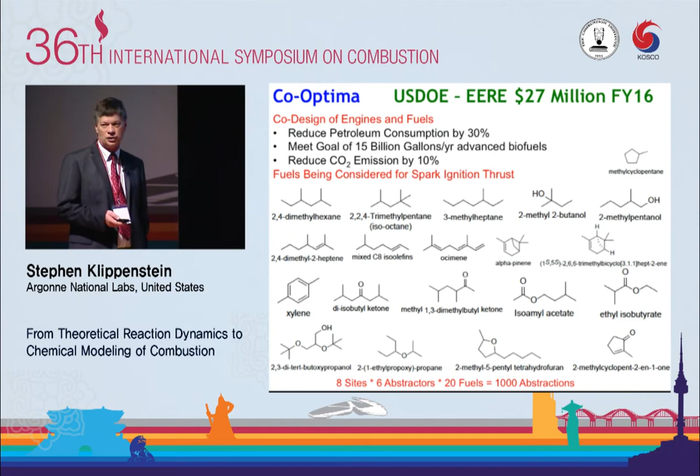So Bill Pitz, for example, is working on this project. He has to try to come up with rate coefficients for those 1,000 reactions, just for the first stage, just for understanding how we get the fuel radical.

Of course, things are much more complicated than that. I want to take a few minutes—this is going to be a somewhat detailed slide, and I apologize for that, but I think it's worthwhile to give you some perspective on what's involved in the whole modeling process, so you can see how the different theoretical things I'm going to show you contribute to this overall modeling effort.

I just described how many reactions are involved in just the first step, the abstraction from the fuel, and I said that's the general procedure for producing the radical. There's also, at higher temperatures, sometimes simply a molecular decomposition to two radicals. But either way, the first step in the process is formation of a radical. And when thinking about combustion, the key thing is to try to understand how we get chain branching—how do we get converted from one radical to two radicals? That's a complicated problem in general.

In almost all cases, there are two different kinds of pathways you can follow. One pathway is operative at high temperatures, and another pathway is operative at low temperatures—low temperatures being about 1,000 Kelvin and lower, and high temperatures being the reverse.

In general, the high temperature pathways correspond to the largest and majority of the conversion of the fuel, so that's really the foundational part of combustion, and that's where we've put most of our theoretical work. But the low temperature pathways are really important for understanding things like knock, stability, and whether your engine is going to function. There's a lot of interest and focus on that, especially now as we find low temperature combustion is probably the driving force for improving efficiency.

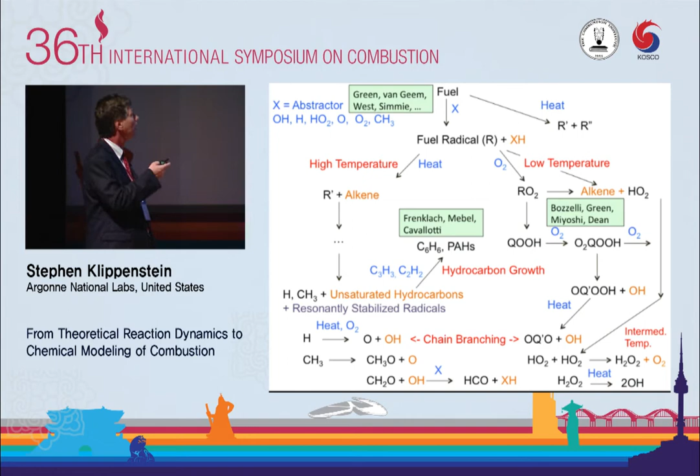The low temperature pathways—Joe Bozzelli has done a lot of work mapping out the potential energy surfaces. Bill Green, Akira Miyoshi, and Tony Dean have done a lot of work turning representations of the potential into rate coefficients for these processes. Mike Frenklach has done a lot of work on PAH pathways, and Alex Mebel and Carlo Cavallotti have also done a lot of work.

This list of people, of course, is very incomplete. It's a large community that has contributed greatly. I'm just trying to highlight some of the leading players.

We've done a lot of work on various aspects. One of the things we try very hard to do is high accuracy studies of prototypical cases. Our studies have tended to look at smaller molecules where you can do really good things, and then the community can build from that knowledge to understand and improve the accuracy for larger systems. I'm going to tell you mostly about these small molecule studies because that's what I do, but it's important to realize those studies can be used to propagate into better understanding of larger species.

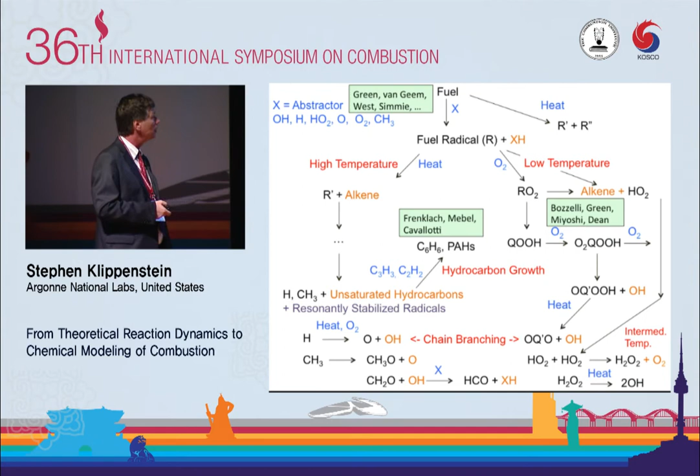Before I get into the theory, it's worthwhile to summarize the standard procedure of developing a chemical model. We have this big mechanism—where do we get all the parameters? The parameters are thermochemical properties for all our molecules, reaction rates, temperature and pressure dependent representations of the reaction rates for all reactions that convert one molecule to another or set of molecules, and transport properties. It's such a huge database we can't possibly determine everything from first principles or experiment.

So the people who do the modeling generally have programmed up empirical rate rules that are developed by consideration of specific studies. Because there's lots of qualitativeness and uncertainty to those rate rules, you don't have a mechanism that will necessarily quantitatively reproduce reality when you first try to simulate things. So there's a lot of work in the community to take the mechanism they first developed and then calculate, predict, and model various observables that one can measure with experiment.

The standard observables they focus on are ignition delays, flame speeds, and species profiles, measured at various temperatures, pressures, and stoichiometries. So the first stage in modeling, after putting together the parameters, is to see how well you reproduce these things. Almost always, when they first run those simulations, they find significant errors in their predictions—significant discrepancies between predictions and observables. Then they have to figure out why those discrepancies are arising.

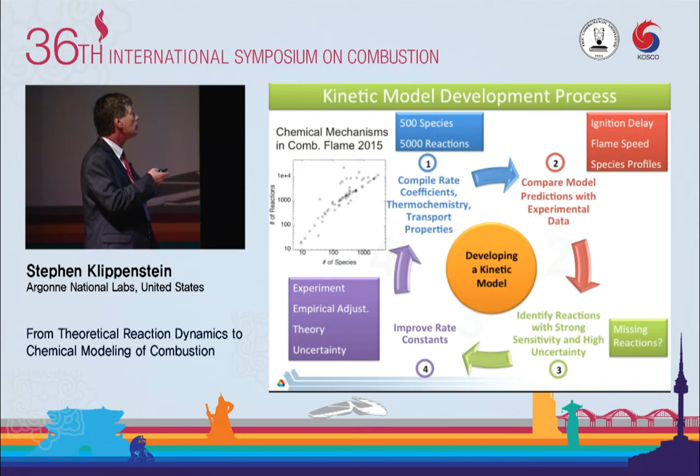More generally and more commonly, what we use theory for is to study specific reactions, these reactions that we identify here. Theory is now able to be implemented quickly enough that many modelers, such as the Curran group and Fei Qi's group, will employ theoretical calculations as part of the mechanism development process.

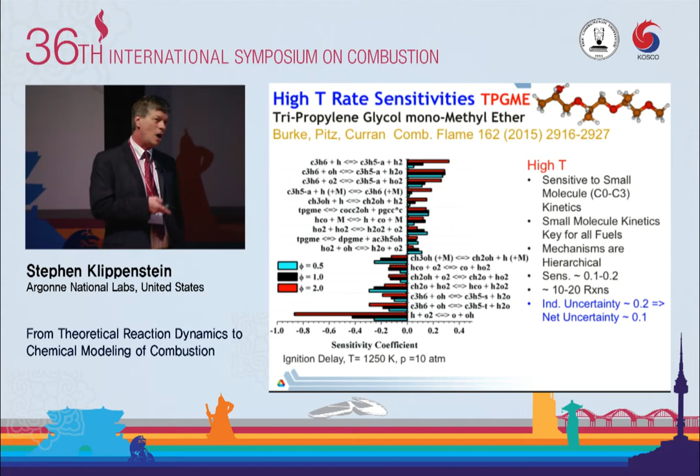If we could get all these small molecule rate coefficients accurate to about 20%, and I'll suggest that's where we're at nowadays in theory, then since there are about 10 or so reactions with sensitivities of about 0.1 or 0.2, your end uncertainty in the ignition delay is only about 10%, which is comparable to what a lot of the experimental measurements of ignition delays are anyway.

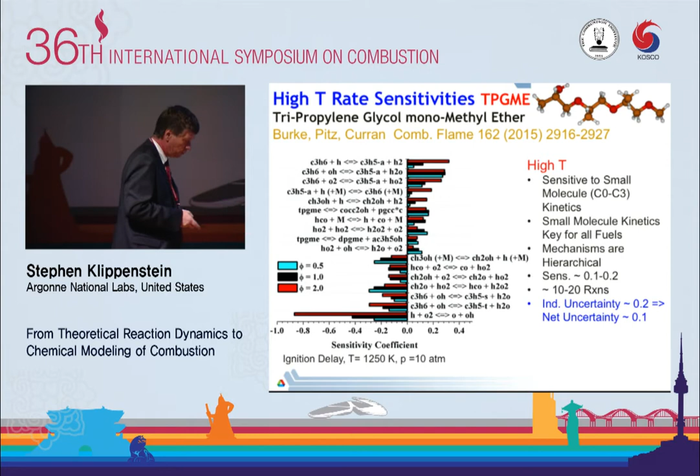So in principle, I'm claiming that you should be able to make a completely a priori mechanism that predicts the ignition delay for standard things to a high degree of accuracy.

At lower temperatures, the picture is not quite as rosy. There's still a great contribution from theory, but now these sensitivities start to be much more with regard to larger molecules.

The abstractions from the fuel, beta scissions of the fuel radicals, molecular decomposition of the fuel. And furthermore, we need to understand these at lower temperatures, and any uncertainty in energy just gets expanded as you lower the temperature. So our ability to predict the key observables is somewhat reduced. Nevertheless, theory is still a great contributor to that process.

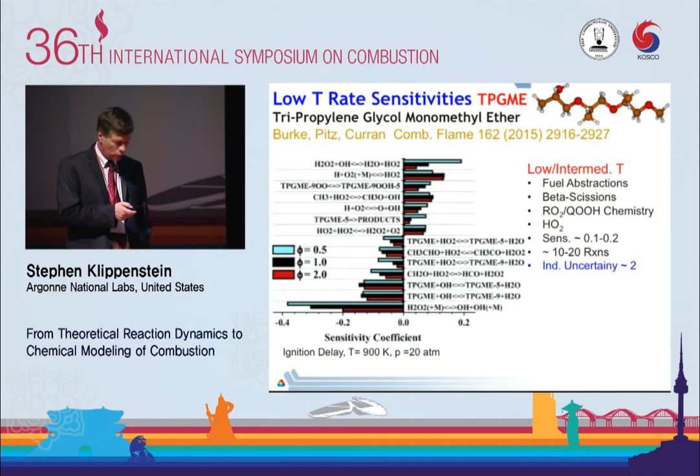In order to start thinking about our theoretical predictions, I'm going to show you shortly, it's useful to think of what the generic model is that we use. We like to call it the ab initio transition state theory-based master equation approach.

The general thing that one needs in a chemical model are temperature and pressure-dependent rate coefficients for the rates of conversion from all the different chemical species, chemical molecules. I'm showing a schematic plot, picking a sample reaction with two wells, W1 and W2, and two separate bimolecular products. I'm going to try to take you through the process of calculating thermal rate coefficients, phenomenological thermal rate coefficients from the master equation.

To do that, we have to think about what happens at a microscopic level, at the microcanonical level, at an energy resolved level. The first thing that happens is you have chemistry going on: isomerization reactions, dissociation reactions, and if you're starting on this side, you might have an association reaction. So we have to be able to understand these rate coefficients for microcanonical energy resolved rate processes.

Another thing that happens is this chemistry is going on in competition with collisions in a bath gas. You have some kind of large bath of nitrogen molecules in a typical combustion simulation, and those nitrogen molecules are colliding with your molecule while it's reacting, raising it up and down in energy. We have to model that process in combination with modeling the process of dissociating.

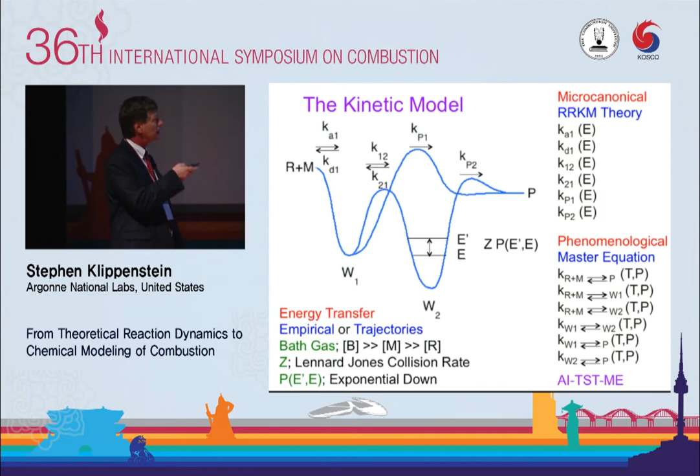One of the neat progress we've had very lately is realizing that we don't need to make this empirical model - we can actually start to calculate them. That's coming from work of Ahren Jasper, and I'll talk a little bit about that later. But this is the classic model, what we call the ab initio transition state theory master equation model.

I don't work by myself. One of the great things about working at a national lab is we have a team of world experts working on closely related aspects of the problem. Just implementing this ab initio transition state theory master equation approach is really the work of a team of 5 of us distributed amongst Argonne and Sandia. I talk with basically all these people on a daily basis as we're trying to probe and think about how to do our calculations better and study specific systems.

Many of you may know Larry Harding. He won the gold medal in San Francisco for his work on electronic structure. He's a leading expert on ab initio electronic structure calculations, particularly multi-reference ones, which are a more complex variety. Yuri Georgievskii is a research associate who knows more about chemical physics than I do, and does much, if not all, of our programming work, and has developed some great codes for us to implement and use in our rate predictions.

Ahren Jasper is here today. He's our leader in chemical dynamics and has contributed greatly to our recent progress in understanding how pressure enters into the simulations. And I'm sure almost everybody here knows Jim Miller. He's another gold medal winner, and he's taught me essentially everything I know about combustion chemistry, and is also one of the leading parts of our work on the master equation.

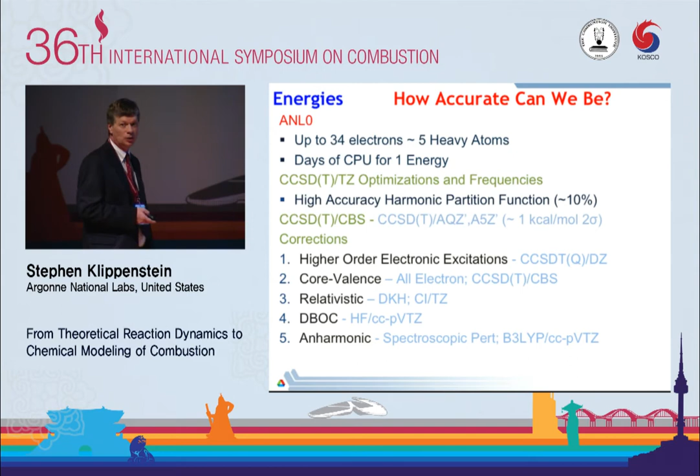We might have to calculate thousands of energies in a simulation. We can apply this approach up to about 34 electrons, which is about 5 heavy atoms, 5 carbon atoms. If we try to go to a few more, maybe 7 or 8 heavy atoms, we can cover essentially all of the prototypical reactions of classes of combustion. This method doesn't let us do a big biofuel or bioester, but it lets us do representative reactions in all the classes we're interested in, and it's particularly useful as we build up our knowledge base.

Another key member we have at Argonne as part of our combustion chemistry group is Branko Ruscic. He's developed an outstanding way to try and determine thermochemical properties, an approach he calls active thermochemical tables. In this approach, he collects all the available experimental and theoretical data regarding thermochemistry of a set of species, and makes sure that the thermochemical properties derived from that data are all self-consistent. That requirement of self-consistency leads to a huge reduction in the estimated uncertainties of your values.

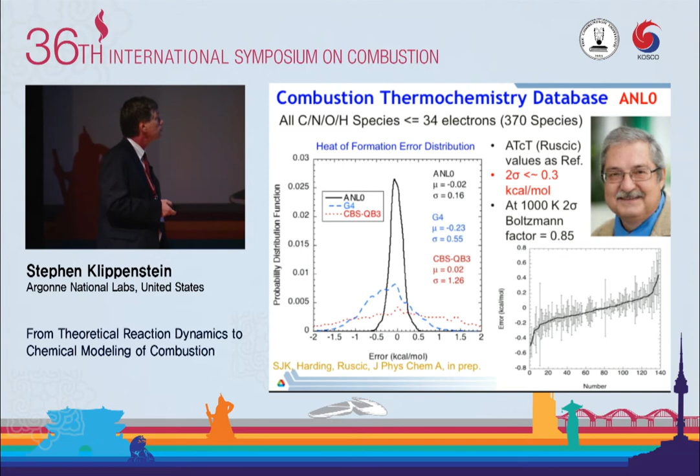Another approach that's kind of intermediate between these two is something called G4, which was developed by John Pople, a Nobel Prize winner for electronic structure theory. So that's the kind of accuracy we can get for the heats of formation, and that's nice. But when we do rate calculations, we actually need to know what the accuracy is for the transition state. Nobody knows what transition state energies are, so we can't do the same kind of analysis — I don't have any reference values to compare to.

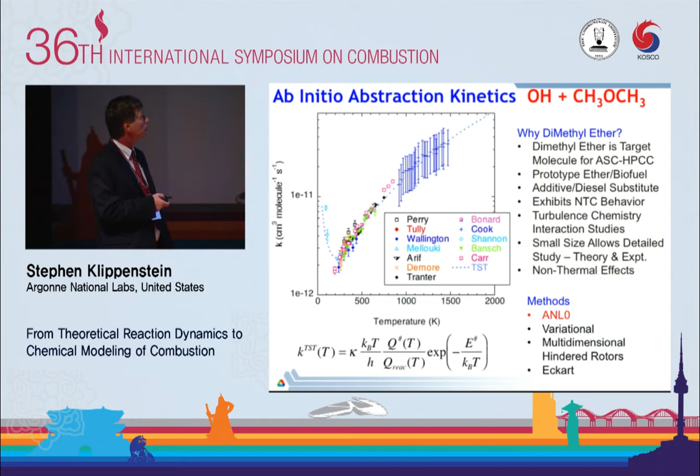That kind of calculation is not one we can do for all systems, and we want to try larger systems. We're just beginning work on extrapolating up to larger systems. These aren't much larger yet, because we're just developing a code and exploring it. Carlo Cavallotti is a sabbatical visitor at Argonne this year, and he and I and Matteo Pelucchi, who's here in the audience somewhere, have been working to develop a code that will let us do this more automatically, using more approximate, standard methods, and looking at what accuracy we get for some systems.

What you see is a factor of 1.5 sorts of uncertainties. One nice thing is that for this reaction, I didn't plot any experimental data. It's very hard for experimentalists to measure, maybe even impossible, rate coefficients for HO2 abstracting from a fuel. Yet you see significant sensitivity coefficients for this in many modeling studies, so they need that data. But I've never seen a real rate coefficient measurement for an HO2 abstraction. The basic problem is that the rate coefficients are very low, look at the magnitude of these. They're ten orders of magnitude lower than for other abstractors, and experimentalists have problems measuring things that slow.

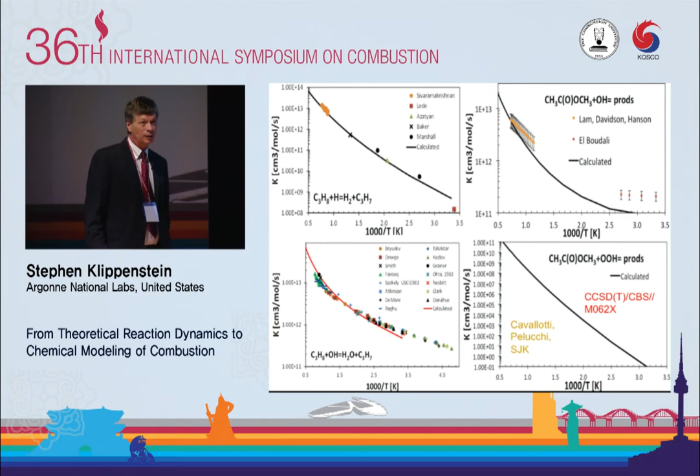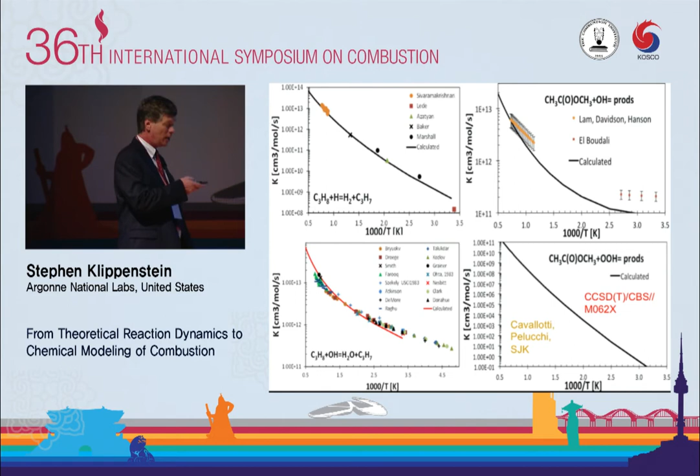You could increase the temperature so the rates get larger, but as you increase the temperature, the HO2 radical decomposes faster than the reaction happens, so you have problems. I know Ron Hanson is thinking about ways to measure it, and maybe he'll succeed in the near future. But for the time being, the only way we can get these rate constants is through theoretical predictions.

So I've just talked about abstraction reactions so far—that first reaction that converts our fuel to a fuel radical. There are many other classes of reactions. One key class is barrierless reactions. For example, the R plus O2 reaction, which is key to the low temperature branching, is a barrierless reaction.

Historically that was a difficult problem for theory, because our standard single-reference electronic structure methods aren't applicable to the transition state region of radical recombination in a barrierless reaction. You have to use multi-reference methods, which are much less black-box. Basically anybody could run a coupled cluster calculation of a stable molecule—I could teach you that in 10 minutes. But learning to do good radical multi-reference electronic structure calculations takes years, if not a whole career, of training.

So that's one of the problems, and Larry Harding, as I said, is a real expert at that, and he's taught me a lot. We've developed methods for doing that. Another problem is that because there's no real saddle point, you have very highly anharmonic modes, and we have to treat the full coupling of all the anharmonicities of these modes. Together, Larry Harding, myself, and Yuri Georgievskii developed a method for doing this about 15 years ago, and applied it to a whole series of reactions.

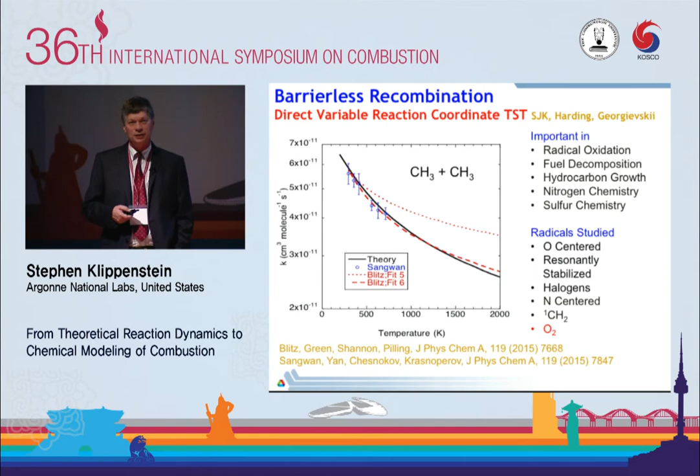For R plus O2, the methods do not agree, and there's significant discrepancies. Those discrepancies lead to such large variations in our rate predictions that we don't find them particularly useful. But recently, with Franklin Goldsmith, we found a way to try and bypass that problem.

It involves thinking about the excited electronic state with our high-level single reference methods, and then using multi-reference methods to look at the spin splitting. That approach gives a much better consistency between our two different methods for calculating the potential energy curves.

This is showing the energy for ethyl interacting with O2 as a function of how far apart the two moieties are, and the different curves show the different methods. The red and black are the two key methods, and the dotted lines are what happens if we go to this improved method. Now our discrepancies are down to a few tenths of a kcal.

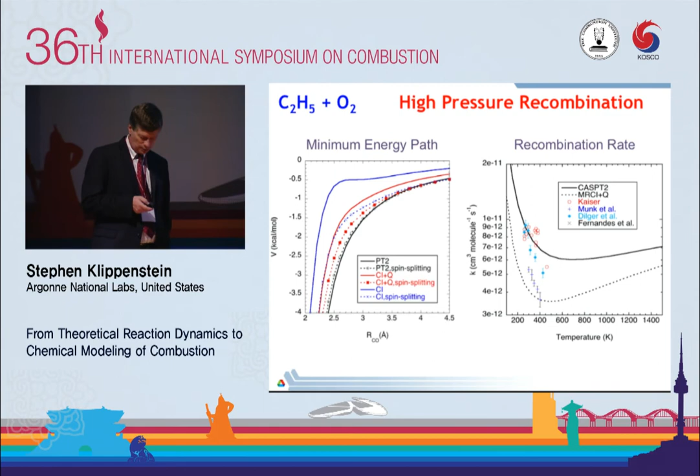When we turn those into rate estimates, we still have some variation in our predictions, but that variation, if we took the average, would be only about plus or minus 20 to 30% at the key combustion temperature. It looks like CAS-PT2, the one method we use, is probably the better method, and we keep seeing that, starting to presume it may be the best method. Now that we've got this method, we can look at a whole series of radical oxidation reactions.

So we've started looking at vinyl plus O2. Feng Zhang, who's giving a talk later, has looked at larger PAH radical plus O2 reactions. There's basically no real limit on the size of system we can look at with this method.

It gets to be somewhat CPU intensive. We have to calculate tens of thousands of electronic structure points with this method, which is quite a large sounding effort. But the reality is you can parallelize that and use each different processor on your massively parallel computer to get these kind of rate constants in a matter of a day or less in general.

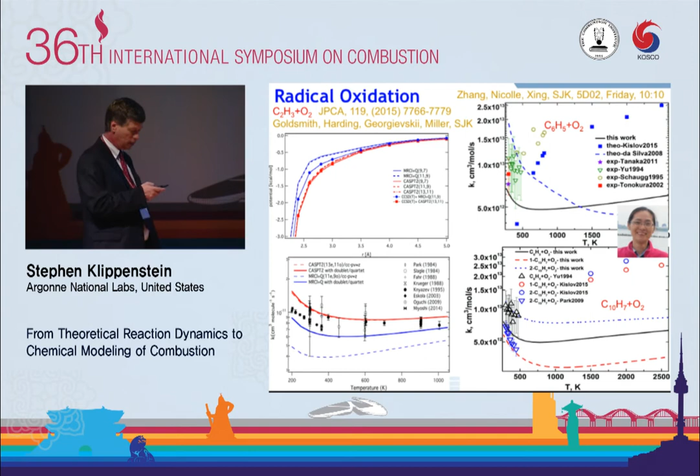What I was looking at there in these various reactions was just the high pressure limit. But almost all reactions in combustion are pressure dependent, and we need to understand that pressure dependence. For the most part, the theory has treated that part empirically, as I talked about with the simple model using Lennard-Jones collisions and exponential down energy transfer.

If we have a set of data, we can choose this parameter so that we get a nice reproduction of experimental data. That's nice, but it's not very satisfying to the theoretician who wants to predict that a priori.

And it's really not very nice when you think about trying to look at a system for which there is no experimental data, or even more simply, when you try to extrapolate to the temperatures of combustion, where there's almost always no data on the pressure dependence, or at least very limited data.

You can do empirical things, and we've developed an understanding over time of the size dependence, the temperature dependence, and the collider dependence, but that still leaves you with about a factor of 2 uncertainty, and we really want to do quite a bit better than that.

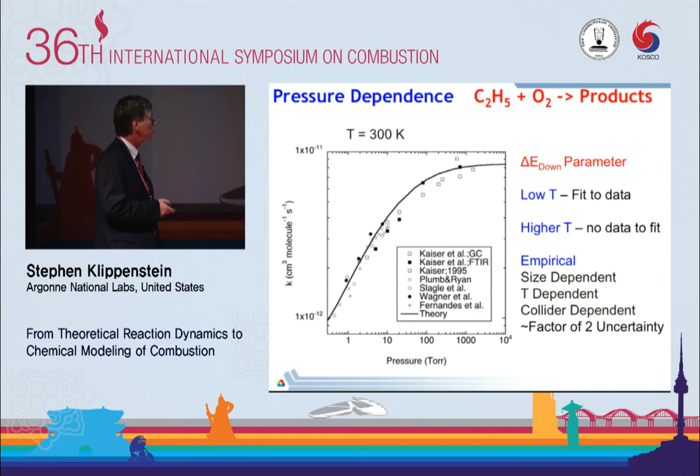So the key step forward in this was realizing, with Ahren Jasper, that he can calculate those energy transfer rates. It turns out to be a little bit more complicated than just calculating energy transfer, though, with trajectory simulations, because when you think about a molecule between collisions, it doesn't just conserve its energy, it also conserves its angular momentum.

Your rate constants depend on what your energy and angular momentum are. So we have to keep track of both the energy and the total angular momentum of the system and how that changes as a result of collisions. Once we do that, and put it into a new master equation where we treat both parameters, we can make a priori predictions of the rate coefficients.

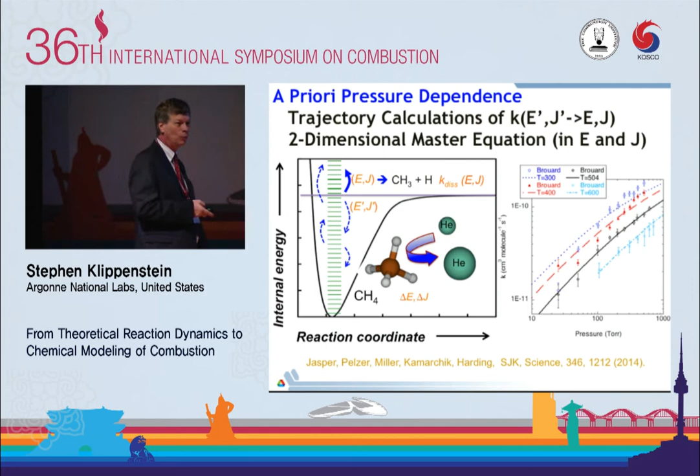But what you see is we get within 10 or 20% agreement. Again, it's hard to tell, we don't have the absolute numbers. We have experiment as a surrogate, and we're more or less within the error bars of those measurements.

Another system we looked at is the vinyl system. Here we're able to look at both the decomposition, which is going on at quite high temperatures, 1,000 Kelvin more or less, and we get, again, without varying anything, perfect agreement with the experimental data within the error bars. At lower temperature, we appear to have some kind of slight underestimate, but it's only at about the 20% level.

At low temperature, again, our Boltzmann factors become more uncertain, so it's not surprising we might have some minor discrepancy. One of the things you see here is the difference between these two curves is the difference between assuming that angular momentum is statistically distributed after each collision and properly treating it. And so we see really we have a factor of 2 lowering of the rate constant.

You might ask, well, why didn't we learn this long time ago? We've been modeling pressure-dependent reactions for 30 years or so since Troe formulated his approach to representing things. And the answer to that would be simply, well, we've been treating this all with an empirical parameter. You can adjust your empirical parameter to give you whatever you want, and then you don't learn what the fundamental physics are.

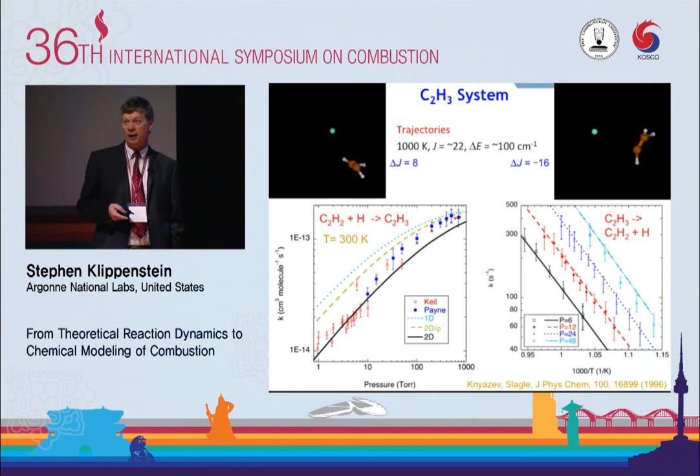This is going to be important as we go forward, because now we can look and think about things where channels are in competition with one another and expect to get real and proper representations of the pressure dependence for that. More importantly, we can start to think about different colliders and presume that we can really make valid statements of how your pressure dependence changes with different colliders. That's important in thinking about lots of the new combustion schemes like chemical looping and mild combustion, oxy-fuel combustion, and so on.

With this approach now, we started looking, of course, at the key combustion, the most important pressure-dependent reaction in combustion, H plus O2 plus M. That's of key importance because it's competing with our chain branching channel. If we got everything combining to make HO2, then we can't go and produce our chain branching. And so almost every system you look at, you'll find a strong sensitivity to this reaction.

Here we have results for 300 Kelvin, and we see that our a priori predictions are, again, in quantitative agreement with experimental data. There's some minor discrepancies with the best fit models, and that may have some interesting ramifications for the overall combustion process, but we're still in the midst of producing these results, so we haven't started exploring that yet. It is still a work in progress.

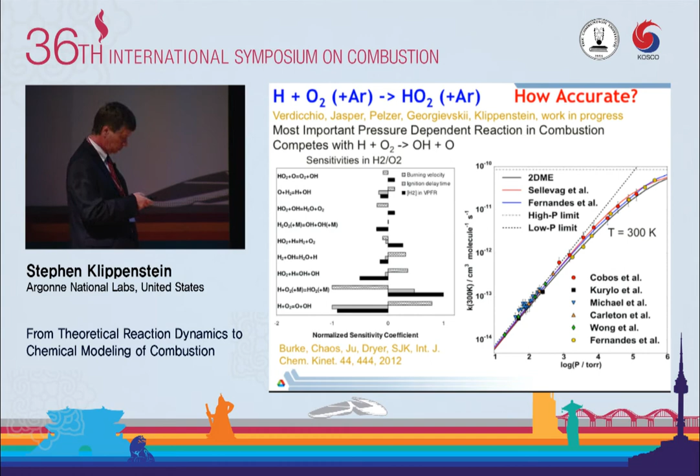That result was for 300 Kelvin. Of course, in combustion, you don't really care just about 300 Kelvin. You care much more about higher temperatures. But there's not so much experimental data to make such beautiful comparisons. Here we show an attempt to compare across a wide range of temperature and pressure.

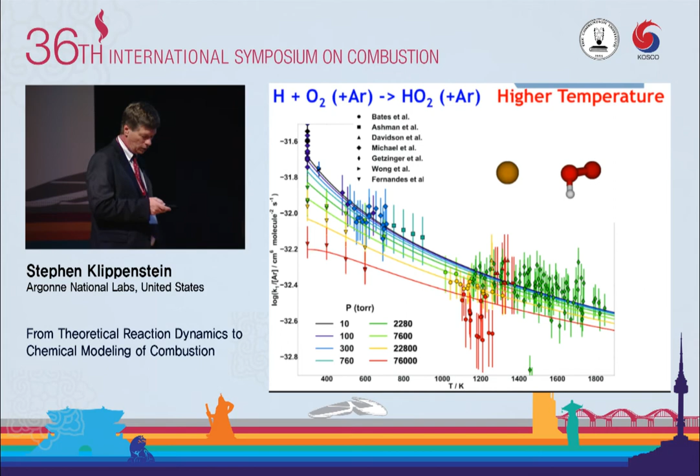The experiments are sort of randomly varying pressure. We can't do the comparison as directly, so we just associate the nearest pressure of the experiments with the corresponding color of the theoretical calculation. And it looks like the agreement is very good again.

As I said, we're really interested in going on to different kinds of colliders. We've started and done calculations for helium as a bath, nitrogen as a bath. We get, again, good agreement. One of the things you find is that the relative efficiency of different colliders varies with temperature.

Currently, there's no way to put that into a chemical mechanism with ChemKin. We've been prodding ChemKin a little bit, ANSYS, and recently they've told us that they're going to release a distribution. In their next distribution, you should be able to put proper temperature-dependent collider efficiencies in. When I talked about this work in Avignon, Tiziano Faravelli came up to me and said, we want to put that in OpenSMOKE. And I believe they've already done that. So if you're interested in doing simulations with proper temperature-dependent colliders, you can talk to him.

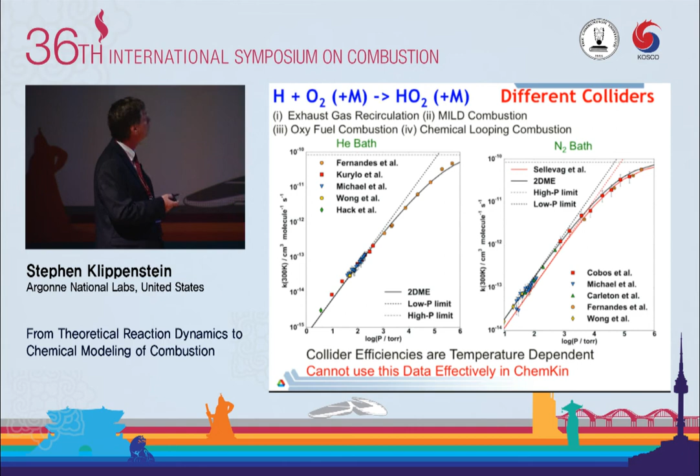Another change in general is that you don't usually just have one single minimum on your potential energy surface. You have many different minima in a typical combustion reaction. Peter Glarborg and Jim Miller have spent years developing mechanisms for understanding thermal DeNOx, understanding nitrogen chemistry. And that process is a great example of the iteration between theory, experiment, and modeling to try and come to a high accuracy fundamental description of the chemistry. One of their key reactions that they thought about and that they were really concerned about was the

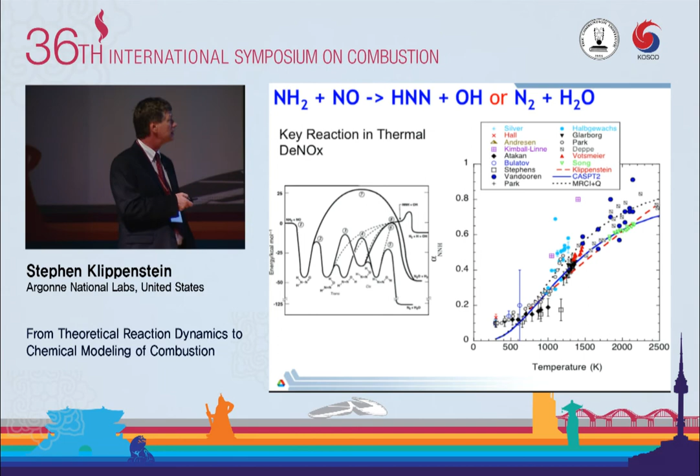reaction of NH2 plus NO, and we have to worry about the chain branching between HNN and N2 plus H2O. Huge number of experiments trying to map this out. The red dotted line was our best sort of model thing where we had a large and substantial variations, adjustments of theoretical parameters, 4 kcals in some barrier heights. This blue line is now our best current prediction, which goes nicely through all the points, and it's nice to see that a purely theoretical description can do well for that.

Sometimes we have an interesting situation where the electronic state of one of your reactants changes. Oxygen atom is a good example of that when reacting with alkenes. You first form things on a triplet state. That triplet state can then couple to a singlet state, which brings you down to much lower energy potential energy surface points.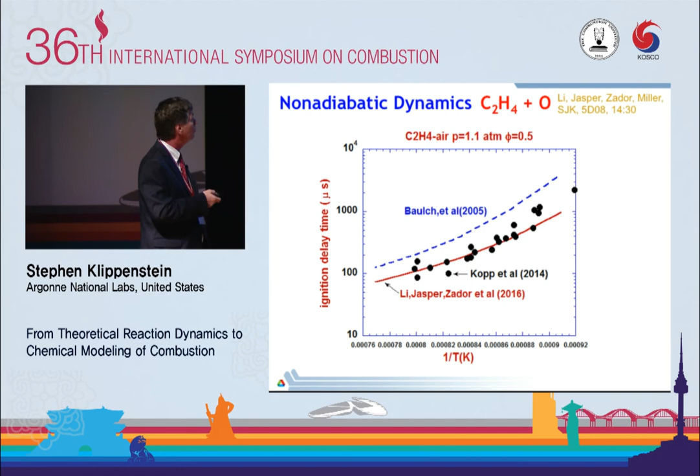Ahren Jasper has developed methods for treating this non-adiabatic dynamics. We're going to give a talk about that later in the symposium. What we find here is, in this case, incorporating these effects makes a significant improvement in the agreement for the ignition delay that one models for ethylene flames.

My work has benefited greatly from collaborating with numerous engineers. I haven't shown all of them here. The list just goes on, and in each collaboration I've gained a lot of understanding. When I think about what's involved in making progress, it's really this collaboration between engineering and science that's going to be central to the final stage of developing good combustion modeling processes. I just want to highlight Mike Burke and Franklin Goldsmith, two key collaborators of mine, postdocs in my group, and Nicole Labbe and Raghu Sivaramakrishnan, who've been central to a lot of the work going on in my group lately.

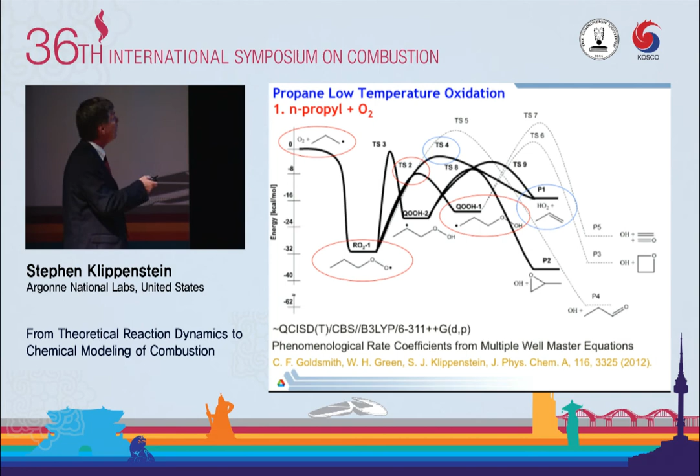One of the first things, one of the more complex systems we've tried to understand, is propane oxidation. Here we have N-propyl plus O2 as the first reaction step. We develop and map out the potential surface and make rate constant predictions.

One of the things we realize that's important as we're trying to develop better understanding of modeling is what are the uncertainties. We collaborated with Alison Tomlin and did some high-dimensional model representations based on thousands of simulations of the rate coefficients with varying parameters. And we end up with 2-sigma discrepancies of about a factor of 5.

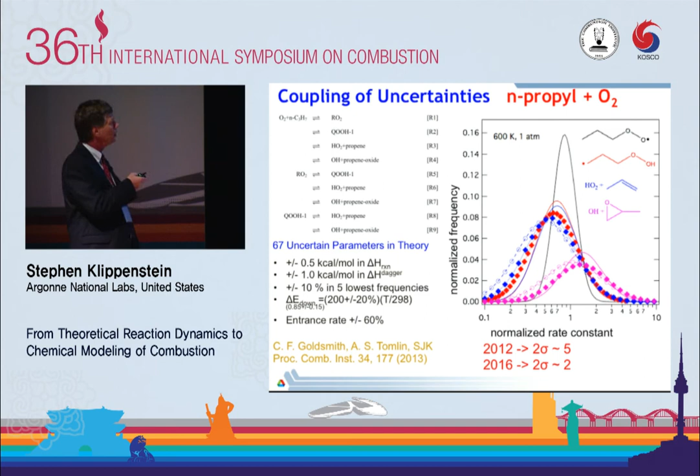That was from 2012, which doesn't seem so long ago. But if I were to apply the kind of things that we're talking about now, I would reduce each of these uncertainties by about a factor of 2 and probably get that sort of overall uncertainty.

That's the first step in our RO2 QOH mechanism. The next step is to add O2 to QOH. The key pathway here corresponds to going over this barrier and losing an OH. This is very exothermic. One of the questions that Mike Burke, Franklin, and I decided to try and address was whether or not this highly exothermic reaction can yield a direct dissociation of this product.

So what I've shown here is a trajectory for going over this transition and going on to products. The H here transfers, and then we're going to see an O-O bond fission. Can you play the movie, please?

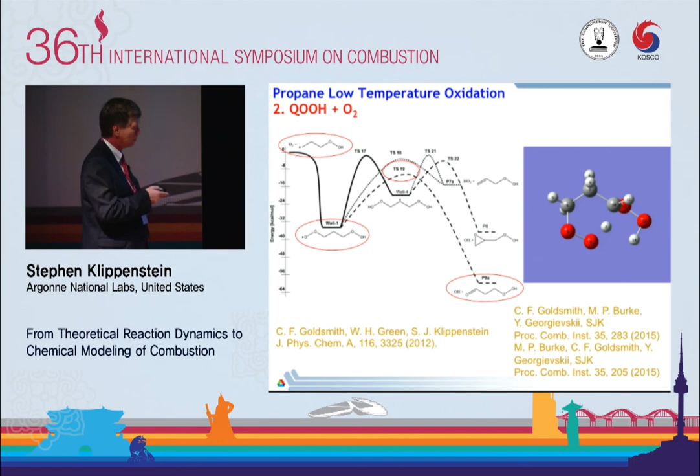I guess we'll skip the movie. I don't have control over it.

What we do if we run those trajectories, we see the distribution of energy in the two species. We can do that thousands of times, get the overall distribution, and calculate the probability of dissociation.

The next step in the RO2QOH low temperature pathway is to have a decomposition of our ketohydroperoxide. This path is supposed to go up here to lead to an O-O fission and get our chain branching.

Don Truhlar and Bill Green found that there's actually a lower energy pathway, 15 kcal lower. You might wonder, well, how can this be happening? That sounds like disaster. This is so much lower. Isn't that going to be the dominant pathway?

But when we put things into our calculations, entropy is a very important part that you shouldn't forget about. And so even though you've got a much lower pathway, by the time you get to 400 Kelvin, 500 Kelvin, this other one is actually the dominant product.

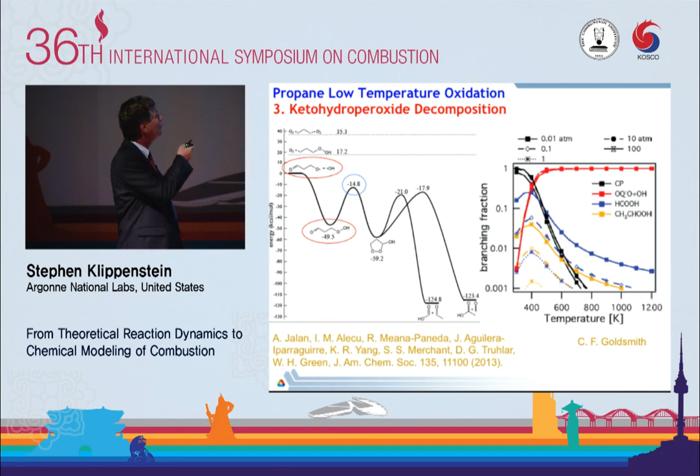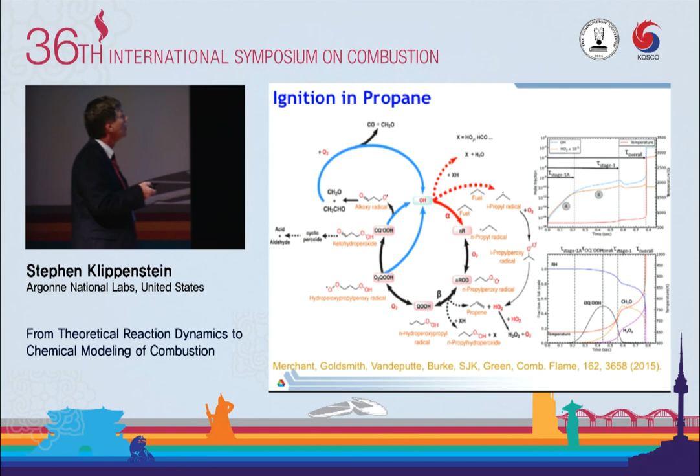We put all that together, and together with Bill Green and his group, we start to model the overall propane ignition delay. This is probably the most fundamental description of first stage ignition, and we expand that to larger alkanes and so on. It gives us an opportunity to really start learning things in detail about the whole low temperature branching.

One of the things we see is that some of these reactions can be occurring promptly. For the study that we looked at in propane, it's only of marginal importance. But when we looked at it and thought about it some more, Raghu in particular and his postdoc Nicole were thinking that this should be very important in the abstraction process. So we start with formaldehyde here.

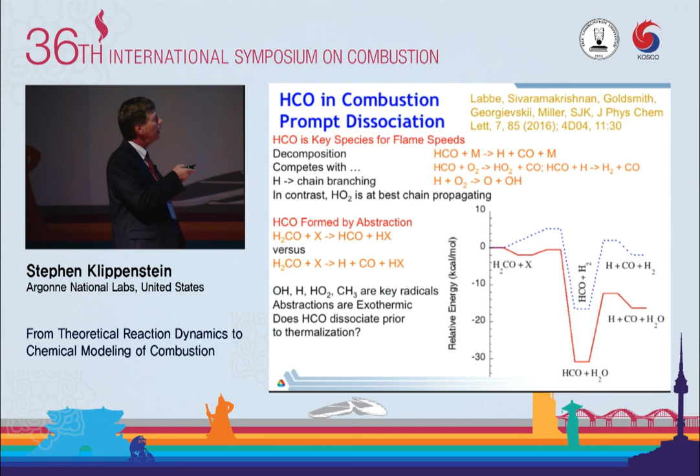We abstract an H with an OH, and go down here to HCO plus water. This state is low enough in energy that where we start is higher than the dissociation to H plus CO. We try to account for that with trajectory simulations, and we're able to predict the probability of this prompt dissociation, which we can put into our mechanism to think about all HCO reactions.

What we find is that you get 15% changes in predicted flame speeds, and significant changes in ignition delays and speciation profiles. In these particular cases, making that change makes the mechanism work worse, which sounds like a problem, like we're not making progress. But we have to realize this has to be an iterative process. We go back, find there's something else wrong with the mechanism, and figure out what that something else is.

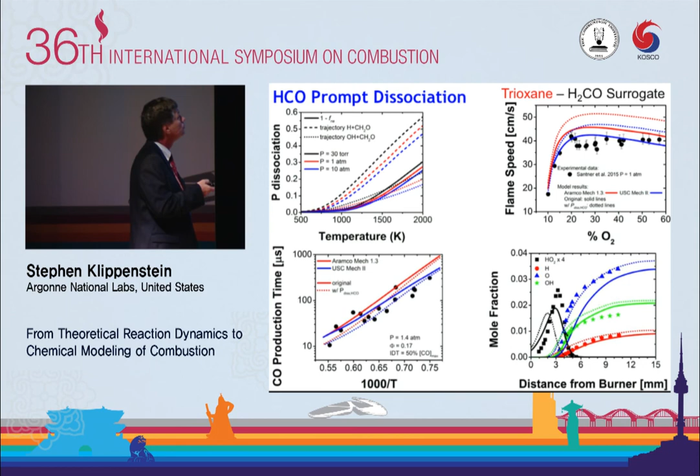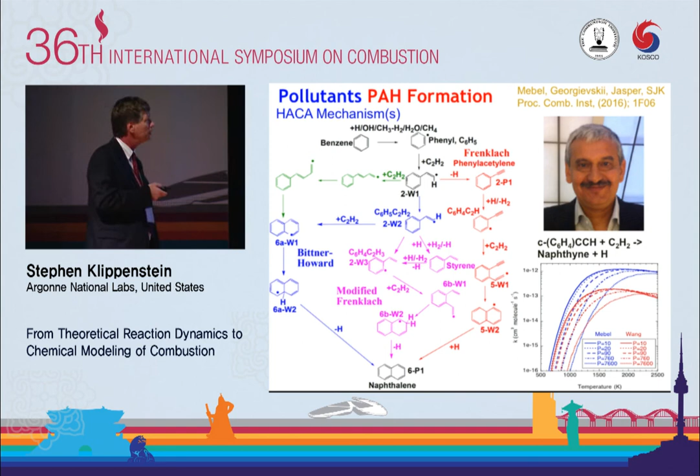We can also look at PAH formation. Alex Mebel has looked at that and had a talk about it. One thing we see is we can do quite a bit better calculations of that. We see there's a strong pressure dependence to our kinetics, even for large PAH species, we have a strong pressure dependence.

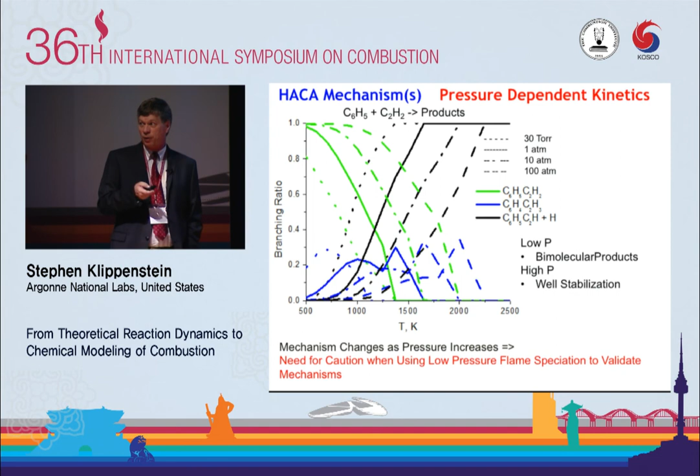And we need to use caution when using low pressure flame speciation to validate it. It's great to use low pressure flame speciation to validate your theoretical model, but you have to make sure that you include pressure dependence or you'll end up with dramatically wrong results.

I've been trying to emphasize the value of theory and how we've reached the point of being predictive. That's not to say experiment is not useful. All of the work I've done over my career has been wonderfully motivated by experimental interactions. The National Lab System has given me the opportunity to interact with some really great experimentalists, and they've been central to my developments.

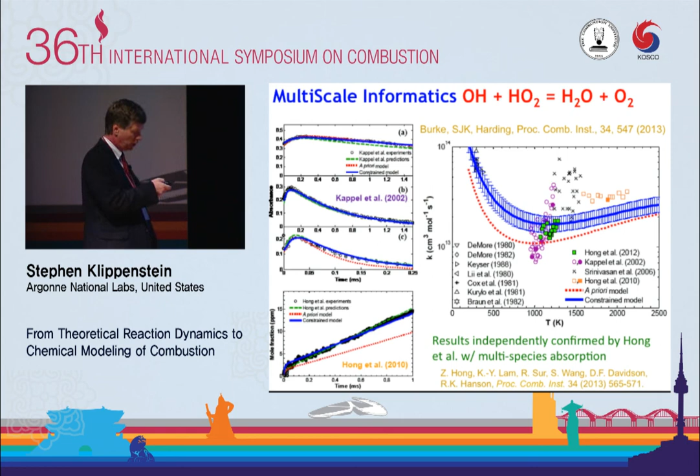The last thing I want to say is that Mike Burke came to our lab and said, let's think about experiment and theory on an even footing, and let's think about the uncertainties in those. If you think about those uncertainties, you can develop much better understanding of the overall process. In this particular case, he developed a good description of the OH plus HO2 reaction.

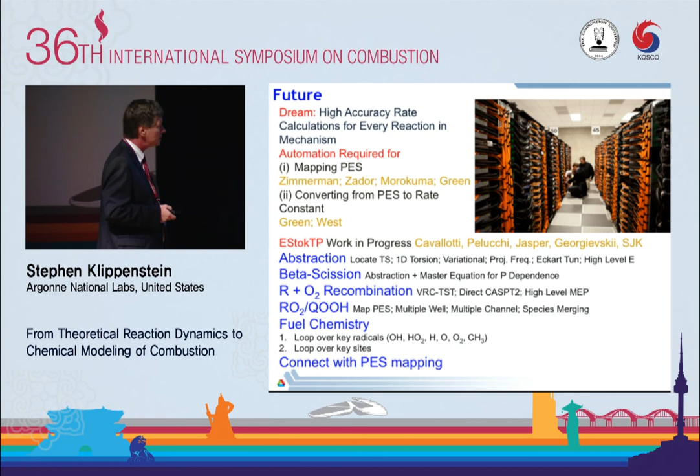My vision of the future is that we start to make better use of the extremely large computational abilities available. We don't use anywhere near the computational power that CFD people do. As we start to do that, we're going to have to automate some processes. Work in that area is starting to happen, but we're not there yet, and I've started to join that game a little bit. Our programs are starting to be made available, and we intend to do more of that in the future.

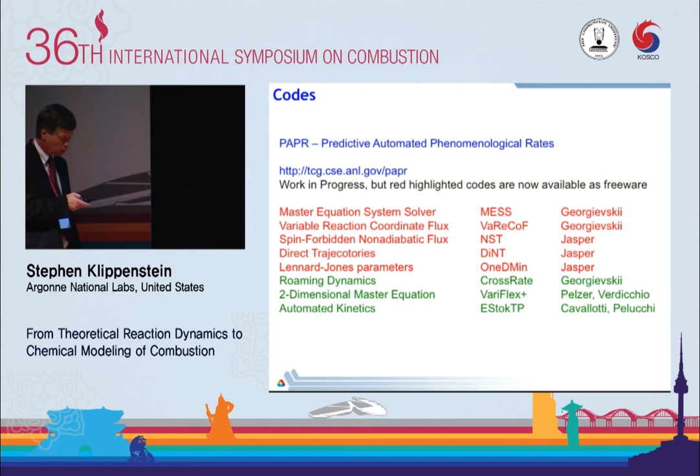I just want to close with a quick summary of the progression in perspectives on theory. Jim Miller's lecture in '96 really saw the explosion of usefulness of theory that was going to come about. Al Wagner was emphasizing the value of continued interaction between theory and experiment, which will always continue. Miller, Pilling, and Troe were a little more cautious, pointing out the need to continue tuning input parameters. I started seeing this future that we're really getting to now in 2011, thinking we could get accuracy to about 20 to 30%.

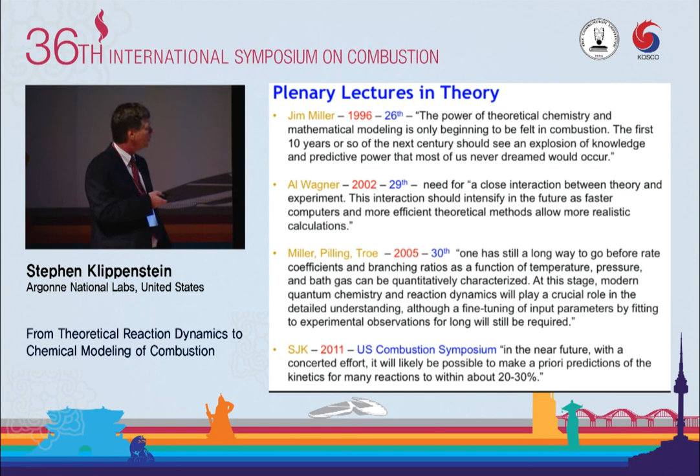And I'm seeing that in lots of calculations now. My belief is that this long sought-for a priori prediction of rate constants, with accuracies that rival high quality experiments, is now here for many classes of prototypical combustion reactions. We still need to work more, with lots of progress needed for larger molecules. But if we keep doing this, I think we'll be able to say, as Al Wagner did, that we're at the point where coupling with advances in computational fluid mechanics will usher in powerful and realistic simulations of practical combustion devices.

I should close by noting the generous support I've received from funding from the Department of Energy. Yes, and thank you for your attention.

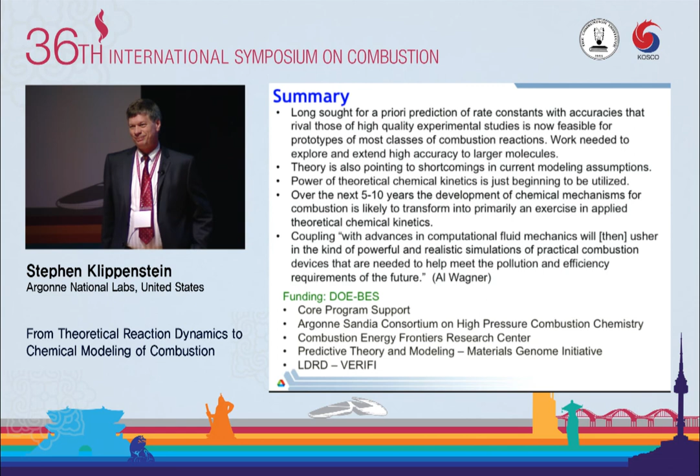Thank you, Stephen, for a wonderful talk where you presented a very complex topic with clarity and rigor. Jurgen Troe years back predicted that in years to come, the prediction of reaction rate constants for elementary reactions would be done with more accuracy than could be done experimentally. And it looks like Stephen has already proven him right. So thank you very much.